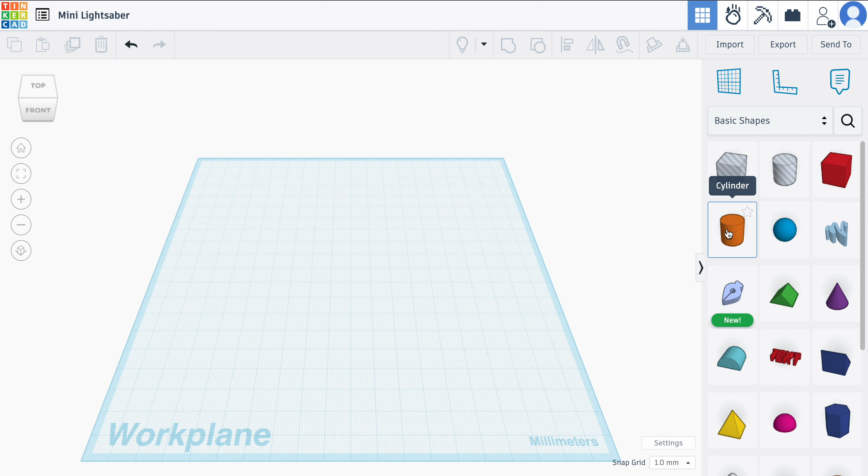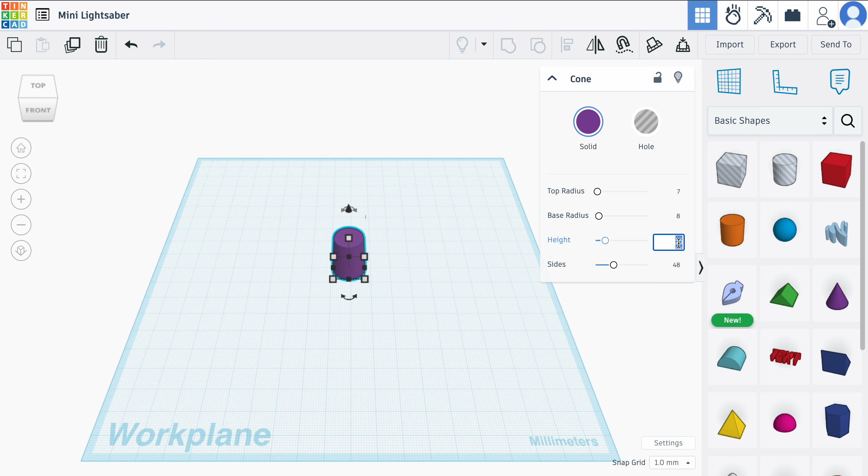To start off today, we're going to grab a cone and drop it off on the work plane. And we are going to change the size of it, not by using these little squares right here, but right on the side. So we're going to start off with the base radius, and we're going to change that to 8. And the top radius, we're going to change it to 7. That way it's going slightly inwards so the pieces can get stuck within each other. And the final thing we're going to do is change the height to 40.

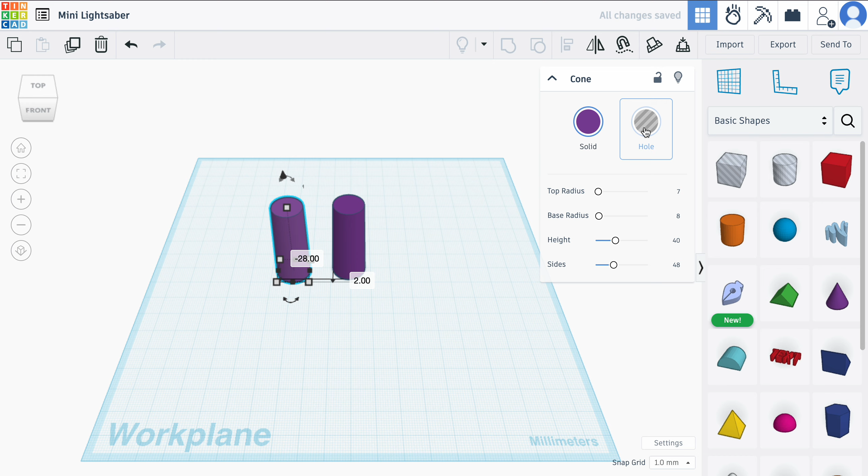And what I'm going to ask you guys to do right now is either to duplicate or copy this piece. You can duplicate using Control D, or copy using Control C and then paste it. I prefer Control D. We'll make a copy right over here, and we're going to turn this one into a hole. It's going to go inside of the piece that we just made, and we're going to want it to be slightly smaller. So we're going to want the base radius to be 7 and the top radius to be 6. And I'm going to stack these two next to each other so that way I remember that they're going to be grouped together eventually.

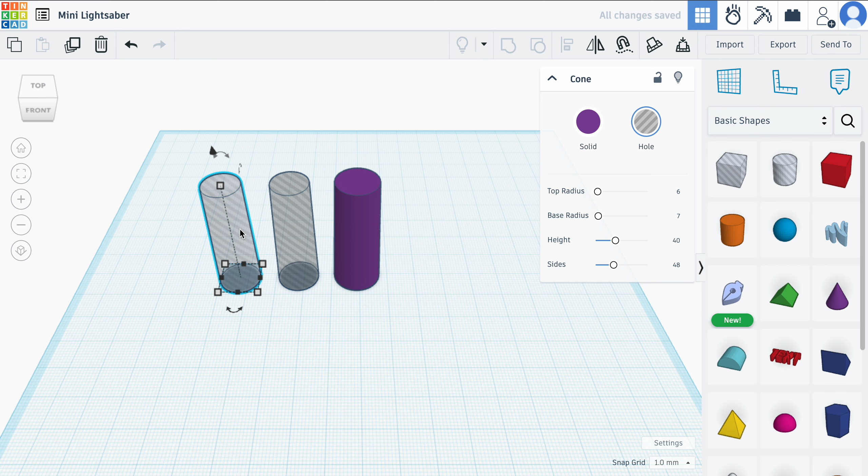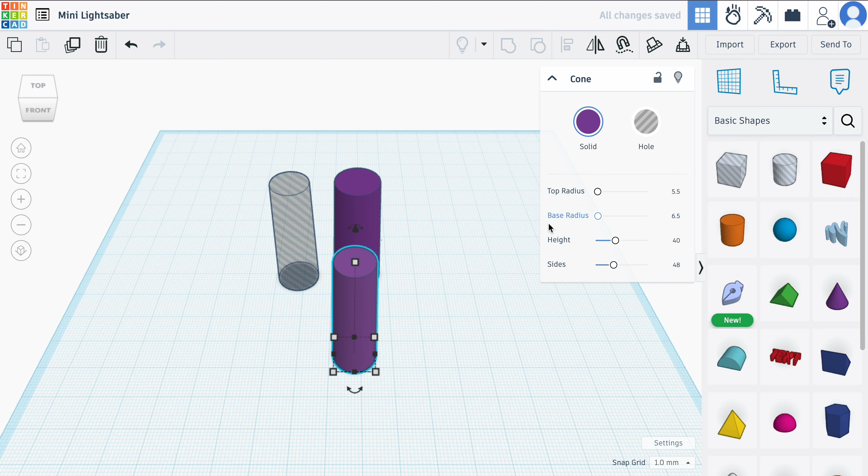And then we're going to once again duplicate the piece that we just made. We're going to bring it down. I'm going to change this one to a solid, and I'm going to want the base for this one to be 6.5. I'm making it slightly smaller so it can eventually get stuck inside of the hole that we just made over here on this shape. And you'll see what that looks like once we start grouping everything together. So the base for this new piece is 6.5, and the top radius is going to be 5.5. And then once again, you guessed it, we're going to duplicate or make a copy.

I'm going to duplicate that, bring it to the side, and we have another hole. The hole for this one is going to have a base radius of 5.5 and a top radius of 4.5. If you haven't noticed yet, there's about a millimeter difference between the base radius and the top radius, and that's just so the next piece that we make gets stuck as it's going up for our telescope design.

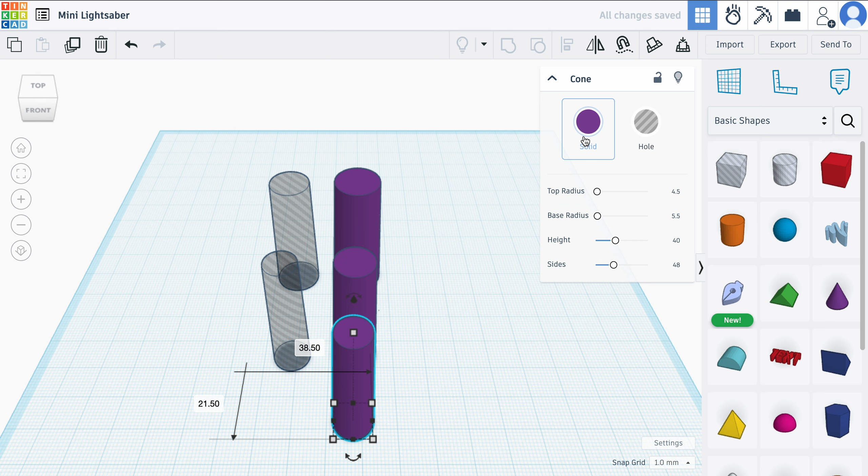And we're going to make one more piece. So we're going to duplicate or copy, and bring it over. For this third piece, we're going to change the base to 5. And just like the other ones, 1 millimeter less, so it's going to have a top radius of 4. And, oops, we're going to do that one more time. We're going to turn this to a hole, and we are going to have a base radius of 4 and a top radius of 3.

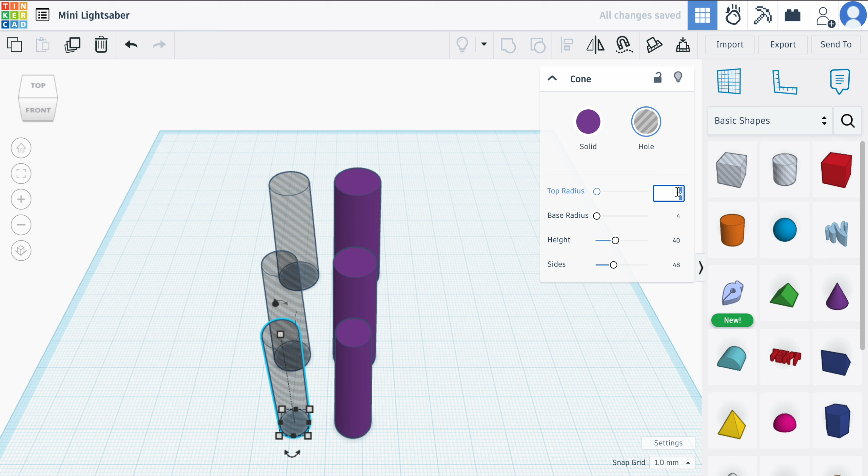And we're going to make the inside piece. So let's duplicate this one more time. We're going to bring it off to the side to not get confused, and make it into a solid. With this piece, we're actually going to change the base, the top, and the height. For the base, I'm going to have you guys put 3.5 because we want it to get stuck in between the base and the top of the smallest hole that we made. And our top radius is going to be 2.5.

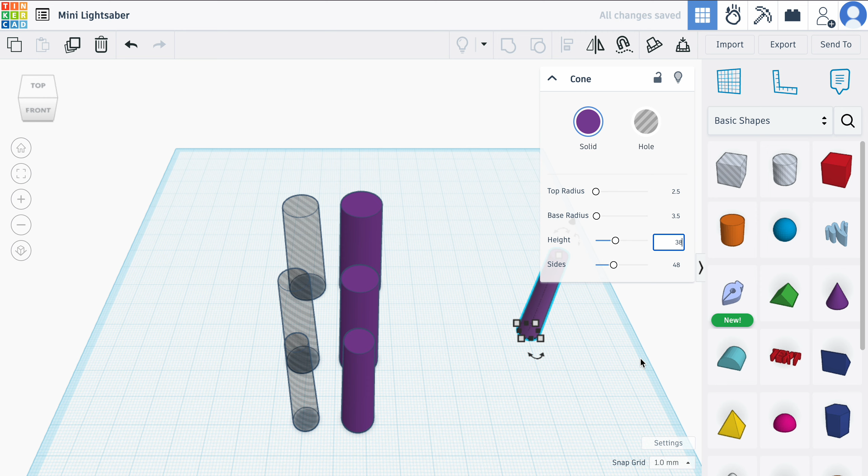I did say we're going to change the height, and that's because we want our tip to be rounded off instead of being flat. So we're going to change this to 38 because we're going to add a little tip on it. On the side over here, you're going to click on this half sphere and drag it onto the work plane. It's pretty big right now, so don't worry, we're going to size that down. We're going to click on one of these white corners and change both sides to 5 and 5. It's still a little weird shape right now, as you see, so we're going to change the height to 2.

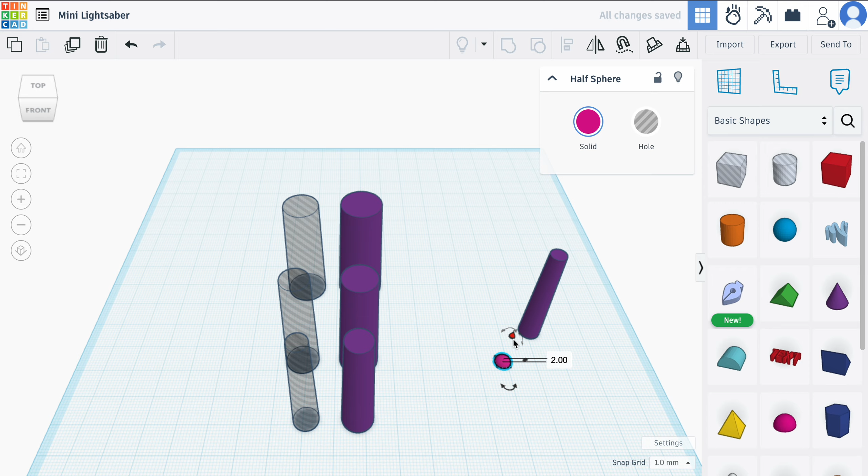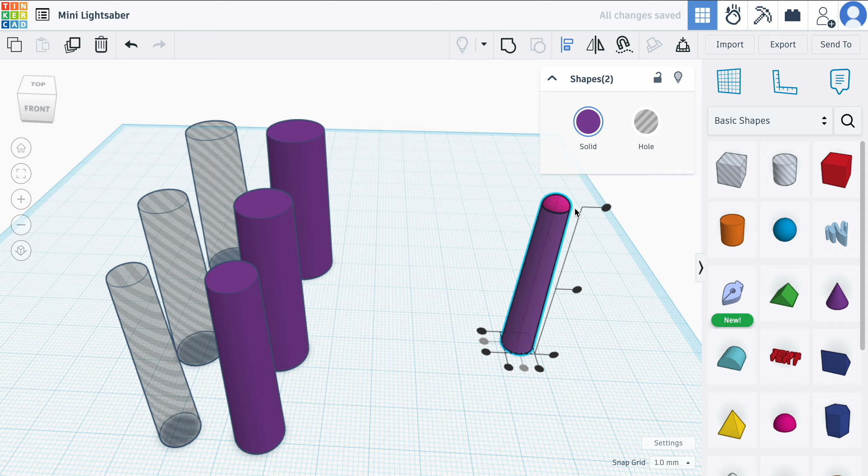And then we're going to grab this part right here, and we're actually going to bring it all the way up. We're going to change the height, and we're going to bring it up to 38, so it's sitting in line with the top of this piece right here. And now we're going to very carefully align these two. So we will align them like here in the middle and right there. And if we look closely, they are in line with each other. There should be no gaps. And so when we group it together, it is now one solid piece.

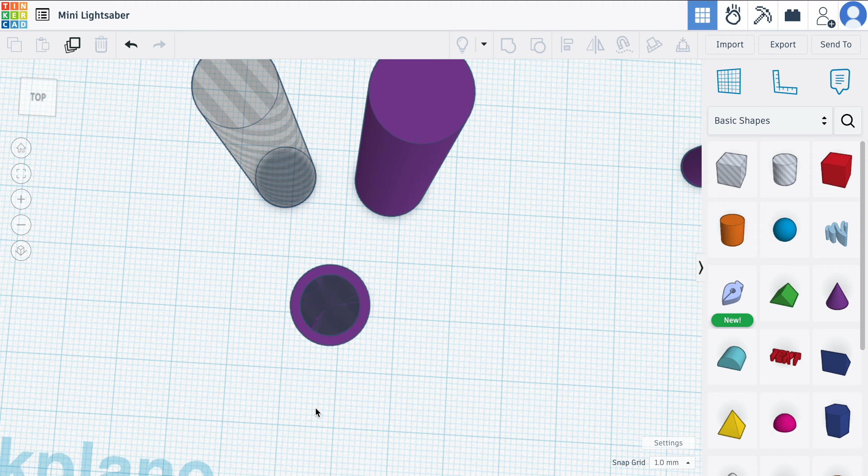Okay, now this is where we're going to bring the telescoping piece all together. You can start off with the smaller ones, the middle one, or the big piece. So we're going to select the two that we had right over here. You can do it like this, or you can use the lasso tool. And we're going to go ahead and carefully align them, making sure that we only align the two that are next to each other. And we're going to line them in the middle on both sides. And you can actually double check, because if you change your camera and hover over, it should be perfectly centered just like that. We'll go ahead and use our lasso tool to select both of them and group them.

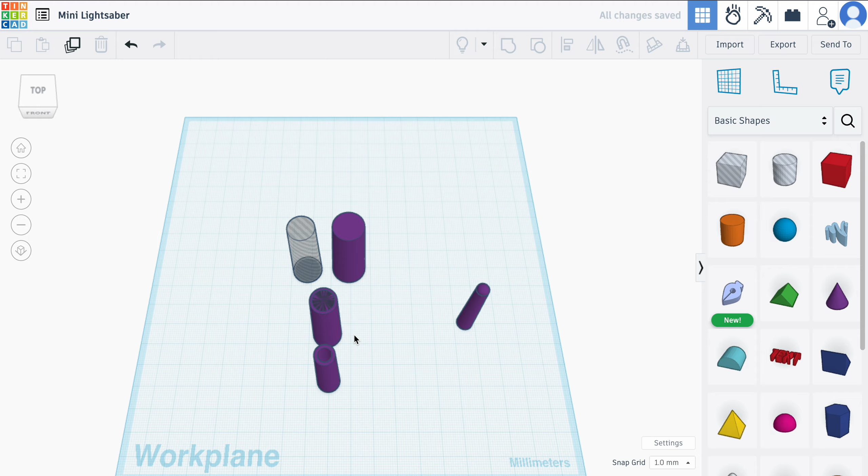And what you will get is a hole that goes all the way through. It's kind of hard to see, but it is changing in size, so the bottom is larger than the top. And then we're going to do that again with the middle pieces. We're going to align them in the middle on both sides so it's even. And then we can select them one more time, group them together. And one last time right over here. We're going to align them, and we have to make sure we group them because we want to make sure the holes are there. And voila.

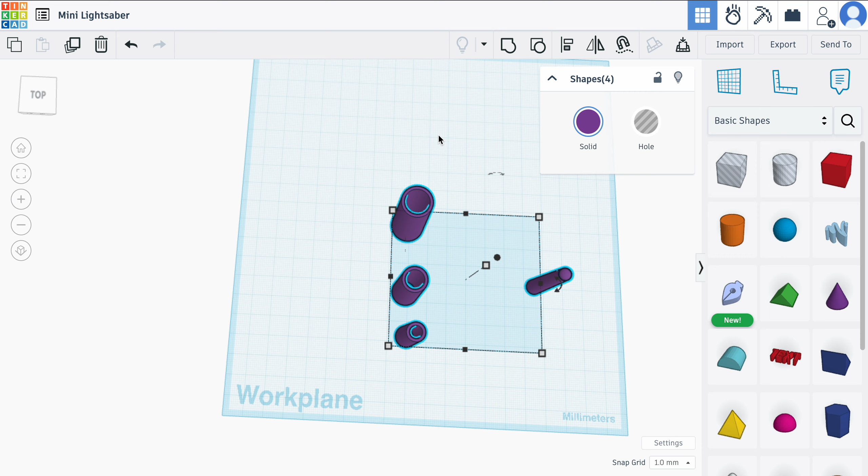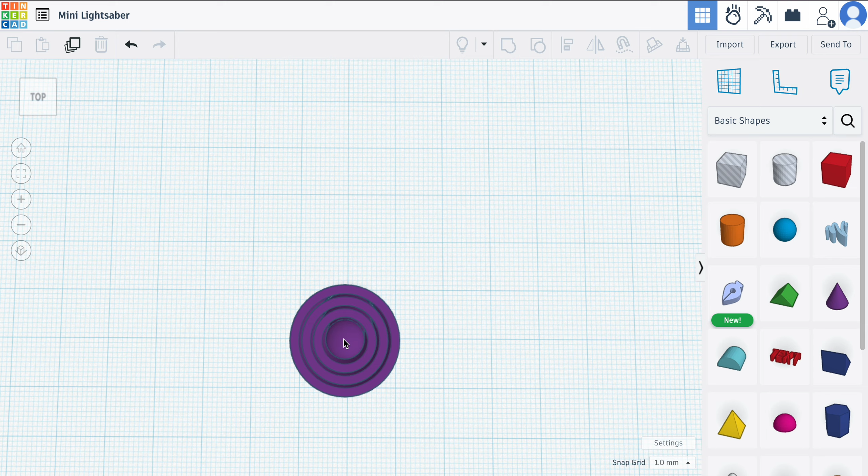So now we're going to put this all together, and we'll get our telescope. So we're going to select the 4 objects that we have right now. We're going to use the align tool one last time for this part and group them in the middle like we have. And if you look closely, let me go ahead and fix that camera angle for you guys, we should have just a little bit of give all the way through so it gets stuck on one. So we can go ahead and move this to the side right now.

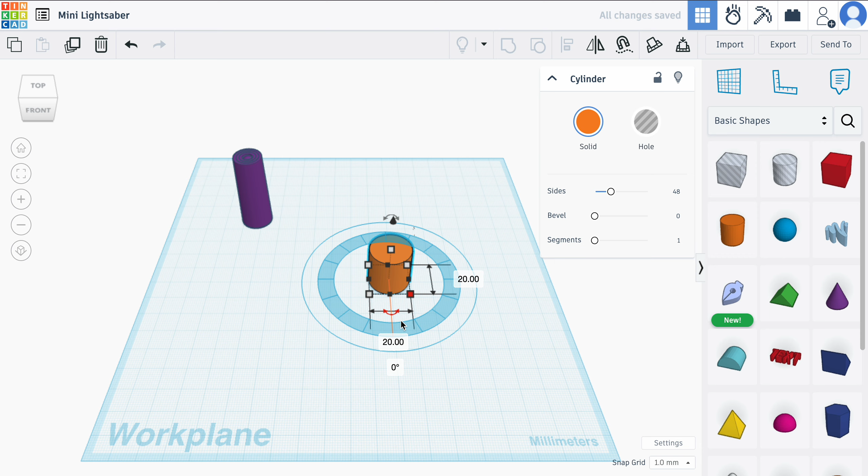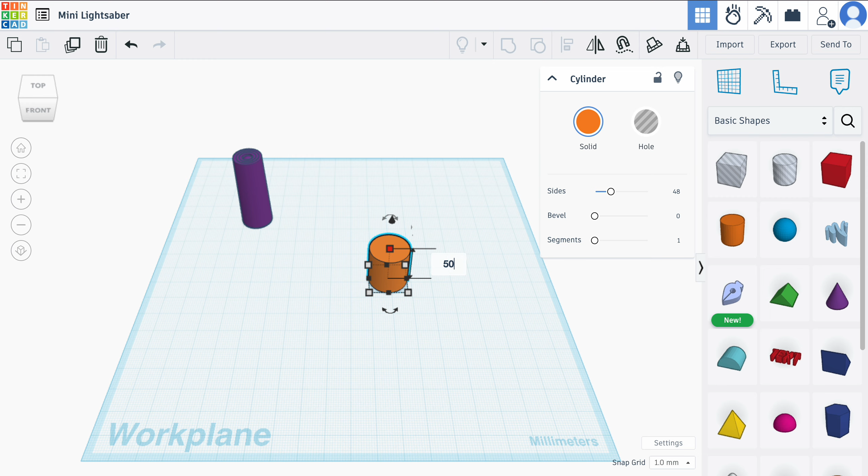Because right now we're going to be working on the hilt, or the part that you use to hold the actual lightsaber. So we're going to grab a cylinder from our workplane. So this is the first cylinder we're working with. And we're going to change the sides here. Let's go to about 19 and 19. And then we're going to change the height over here. I want you guys to change it to, let's try 50 here. So it'll be 10 millimeters taller than our base.

And then we're going to duplicate that, or copy, so we can have 2. And this one is going to be our hole. So the hole, we want it to be a little bit smaller, so we're going to change it to 17 by 17. So it's a little bit smaller, but still large enough that if we wanted to put in the purple lightsaber piece, it can fit inside. And I'm going to show you guys that right now. So we're going to go ahead and align them perfectly in the middle.

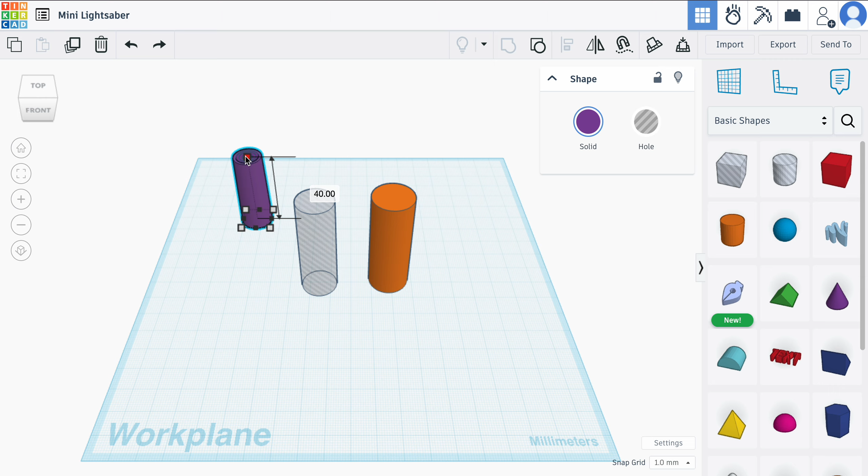And oh no, we almost made a mistake, but good thing we caught it. So we're going to go ahead and press undo right over here. And if I made that mistake right there, I would have a hole going all the way through. So we're going to actually want to change our height over here to the exact same height as our lightsaber piece, so about 40. So we're going to change it to 40 here.

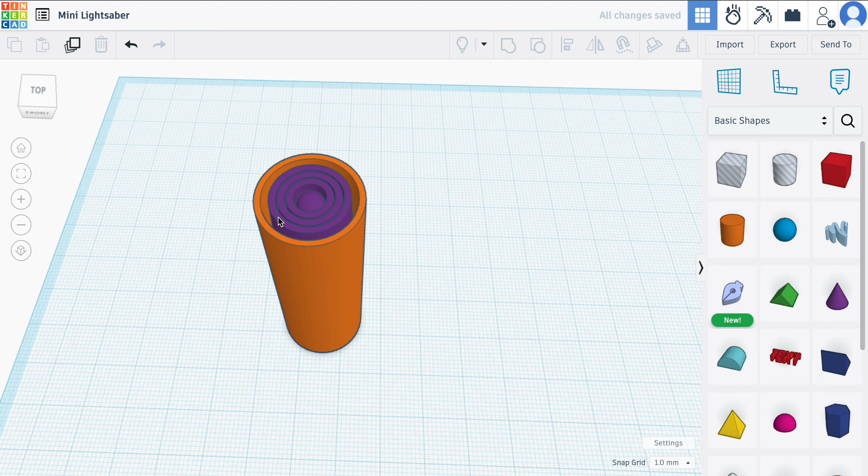And then we are going to align it again in the middle, and then once at the top, because that is where these 3 circles should be laid out. And then we can group them together. And then we can see there is a base, and we want that base because eventually, you guys don't have to do this part. So just watch as I center these pieces and put it to the top. And so when it's on here, it fits perfectly inside.

And then we're actually going to be making a cap for it. So that is our next part right here. So we have our hilt, and we have this guy, which is our lightsaber. And so we're going to make it a cap so the lightsaber doesn't fall out. So to make the cap, we're going to grab one more cylinder.

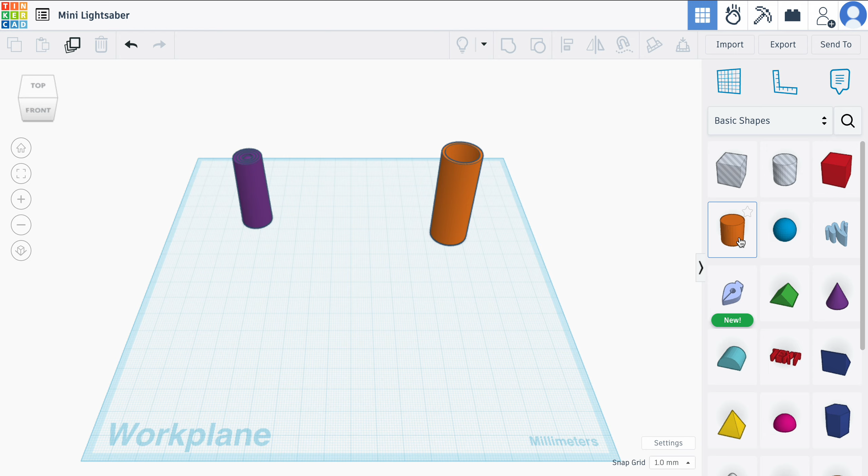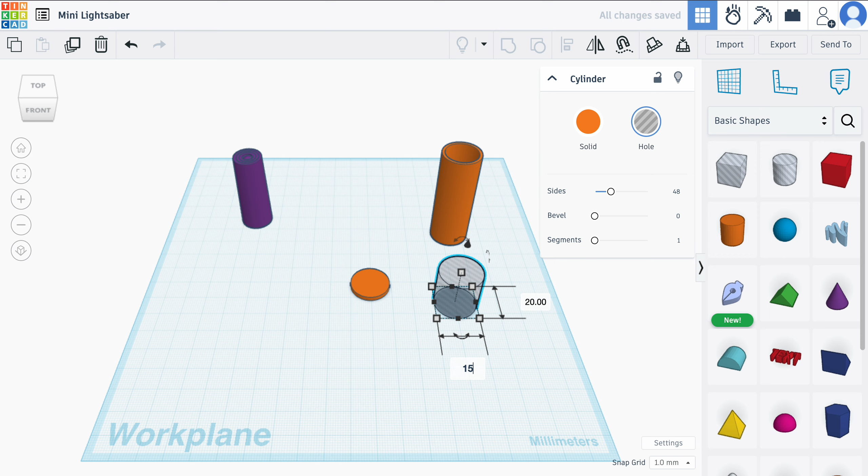We're going to change the height to 2. And then we're going to change the sides to 19. So it's going to be matching the same size of the hilt that we made. So it's 19 by 19 with a height of 2. And then we're going to grab another cylinder, and this one is going to be our hole. So we don't have to worry about the height for this one because it's going to go through. And we're going to change that one to 15.5 by 15.5.

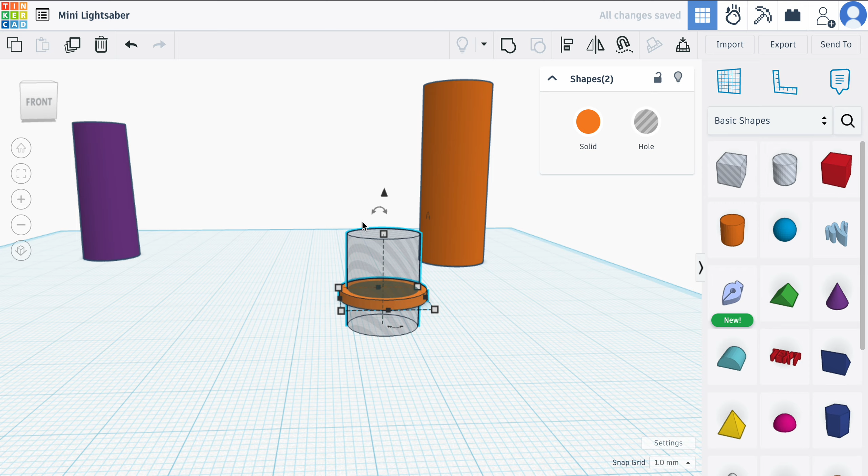And we're going to go ahead and align these two down the middle on both sides, making sure that it is going through all the way. If you are unsure, you can go ahead and click on the hole, even drag it below because we do want it to go all the way through. And we will group them. And now we have our cap.

So our cap, it's going to stay on the floor on the work plane right here because it's going to print out separately. But eventually, when it's all printed out, we're going to glue it on the top of our hilt once our telescoping lightsaber is inside, and that way it can get stuck in there.

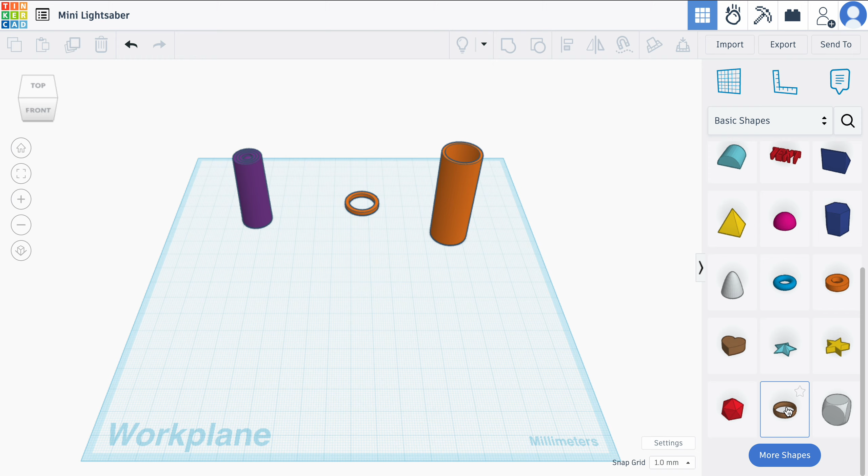So at this point, we're pretty much done with our design, but let's have some fun with it. Let's try to add some cool features or designs to our hilts, right? So it looks a little bit better. So what I'm going to do is I'm going to grab this ring over here. And you guys don't have to do this. Maybe you guys want to add some adornments on the outside of your hilt. I'm going to add some carvings into it.

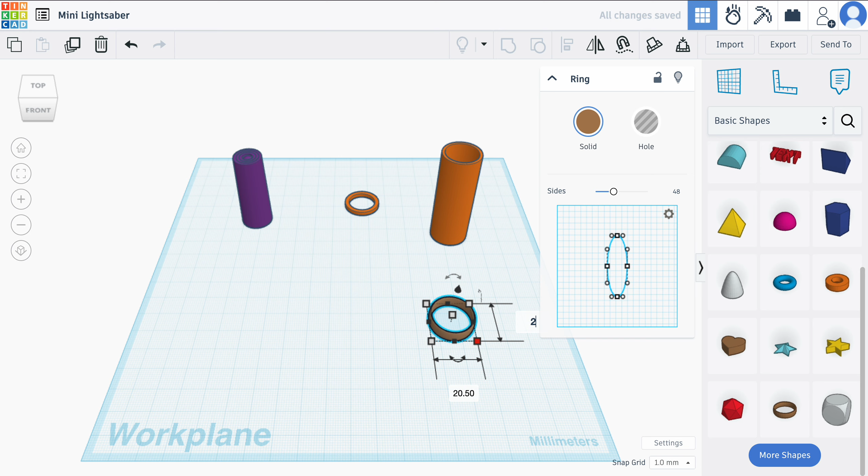So what I'm going to do is I'm going to change these dimensions to, let's say, 20.5, 20.5. I'm going to make it into a hole. And what I'm going to do is I'm going to align it with my hilt. And take a look what's going to happen. I'm going to raise this up almost to the top. I like that. There's enough space right there.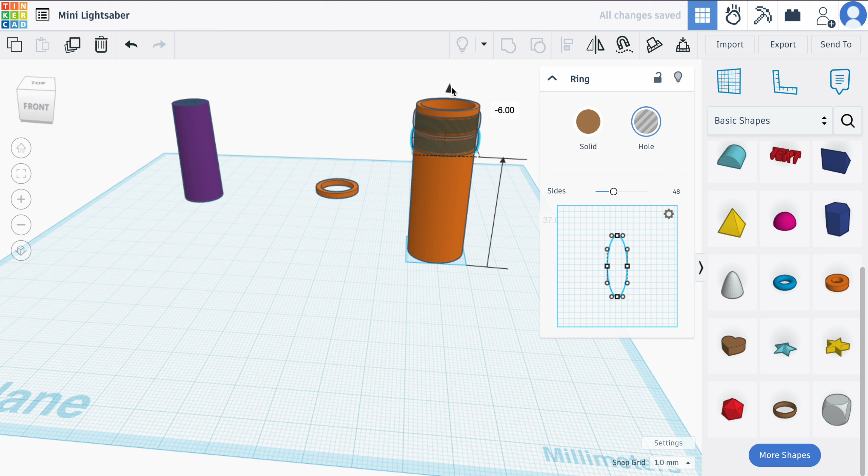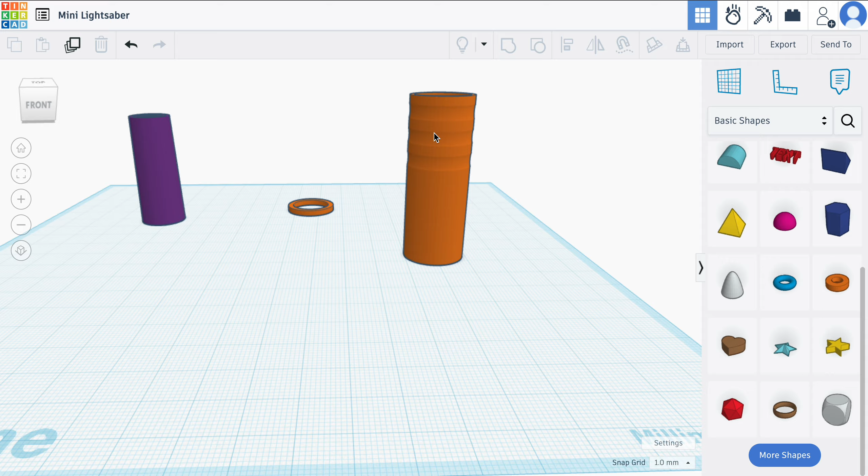I'm going to go ahead and duplicate it. And I'm going to bring it down just a little bit. It's more just of an eye thing. I don't have any exact measurements for you guys. You'll see right now. I just kind of want to add a little something so it's not so plain. And when I think I'm ready, I'm going to go ahead and just group these together. So you can see I added some engravings right there.

Again, you can do what you want at this point. If you wanted to maybe add like a star, a heart, put your name on the handle somewhere, you can go ahead and do that. Just have some fun with it. Be creative. Try to make sure that you're not changing the integrity or the structure of it, because if it makes it too thin, then it's not going to be able to print all the way through. But have some fun with it.